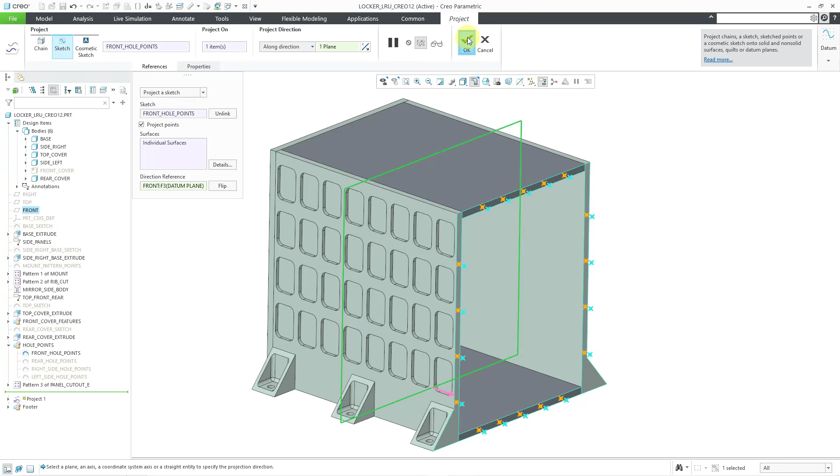There you can see a preview of the projection. I'm happy with this, so I will hit the check mark, and now we can see the projected points. Then I can go about making my different holes. So let me hide the projected points. Let me bring back the original points, and I will also bring back the body that I want to create the holes in.

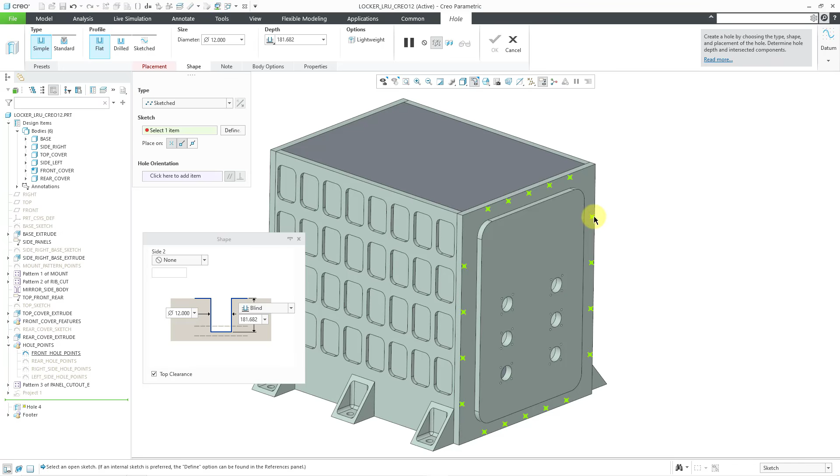So I can click on the hole command, and then for the type, let me change to sketched, and I can pick one of the holes from the sketch. Let's change the type to standard, and I'm going to make this a clearance hole, and then I will change the size to M6. And all of this is good.

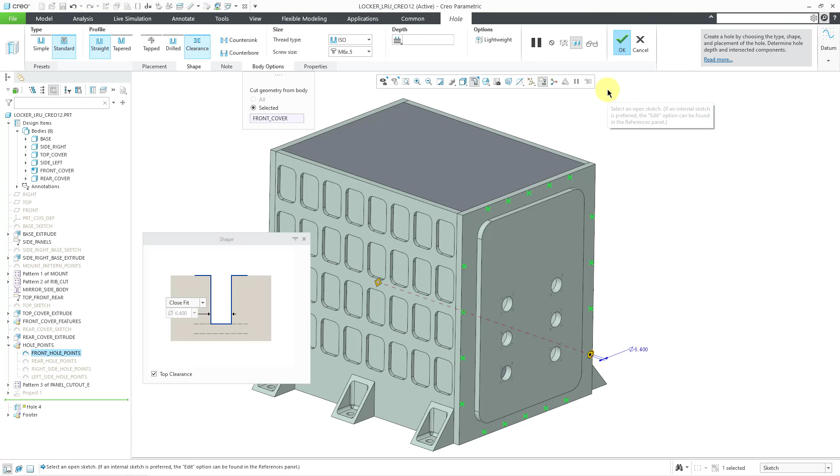Oh yeah, let me go to the body options. Just want to make sure that only one body is going to be affected by this. So now I can hit the check mark, and I've got my first set of holes created. So now let's go back to our project. I'm going to bring that. Let's make it easy to see. Let's hide that front cover again.

And now I can create my new set of holes. And I've actually got to do this in 2 steps. Let me go to the hole command. And if I change this to sketched, well, unfortunately, I cannot select the projected points. So I'll just have to use the on point option. Let me select one of the points. I will hold down the Control key and select the other surface for the reference.

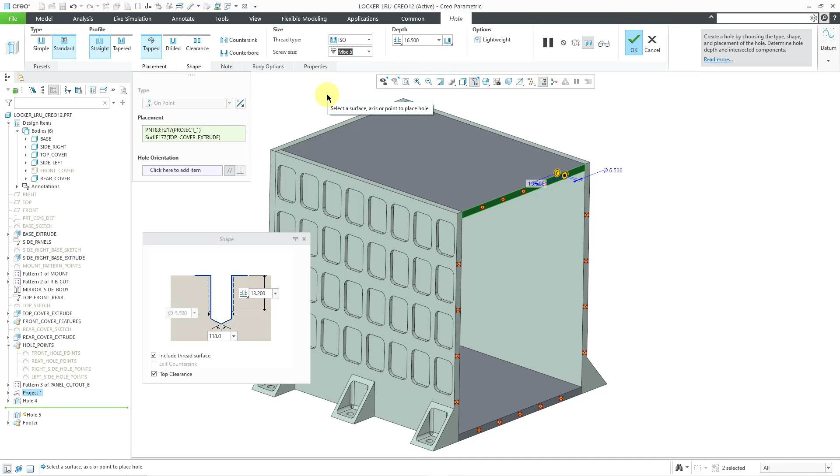Let's change the type to standard, and this one will be tapped. And then let me change this to M6 by .5. I'll just use the most recently used. And let's see, what else do I want to do? Oh, I don't want top clearance for this one because I already have a body in front of it. And let's see, I think this is everything I need for this first hole. So I will hit the check mark.

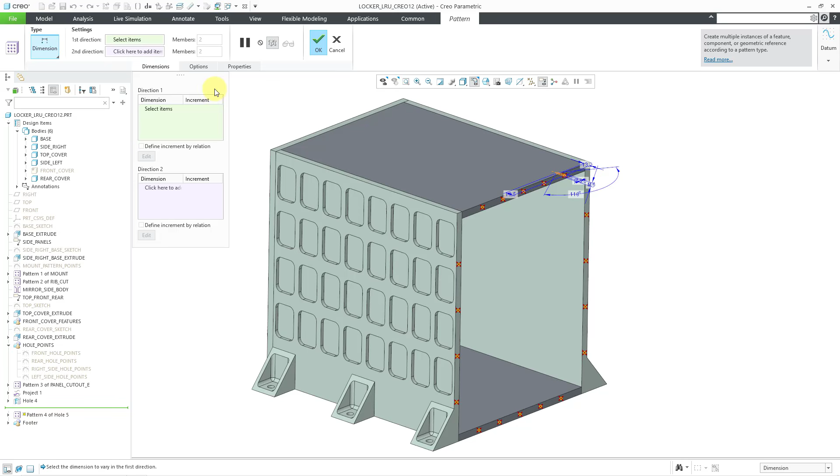And then with that hole still selected, I can hold down the right mouse button to get to the pattern command from my mini toolbar. Let's change the type to point. And I will select, let's change from sketch to from feature, seeing as I have a project feature. And there we can see a preview, and I can hit the check mark. And so now here I have my tapped holes.

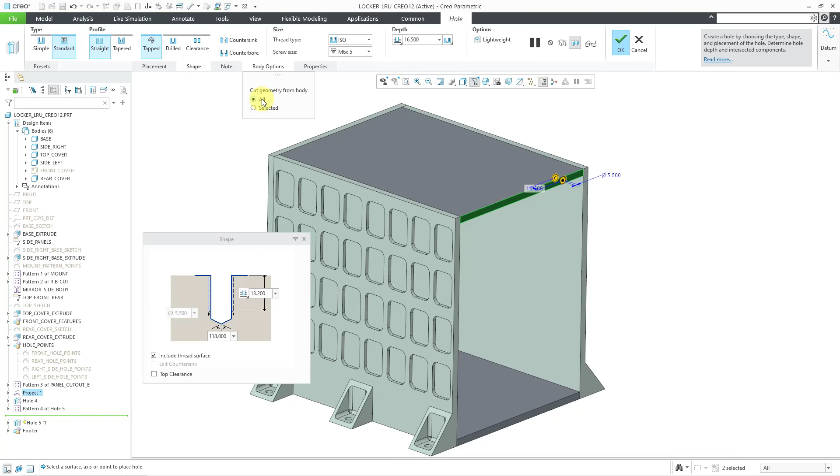Let me turn off my point display. And I see that, oops, I do not see the holes. Let's go back to the pattern, and I will select the hole and edit definition. Let's go to the body options. Let's change this to all for the cut geometry from body. It was just removing it from the front cover, which it did not intersect. Now I can see all of the different holes on here. So this is good.

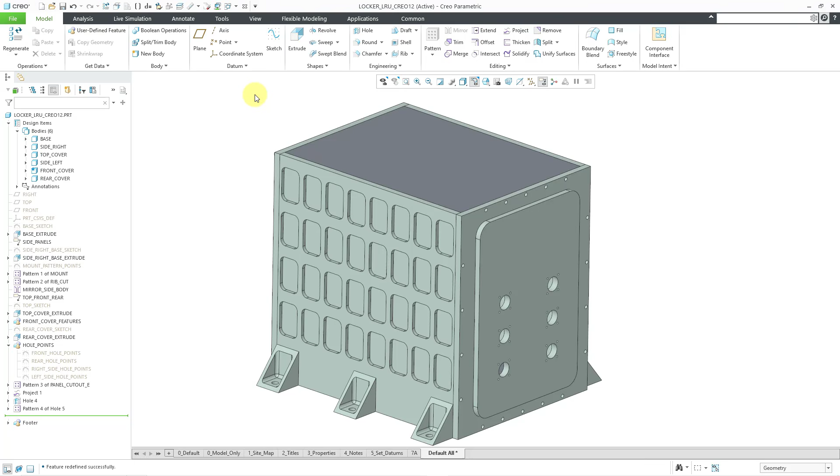So there you have it. There are a few different enhancements from recent versions that I used here. So I did the project holes from the sketch of points, and I also used some of the other different options like creating holes on sketches. So there you have it, just an additional use case for some of this functionality.